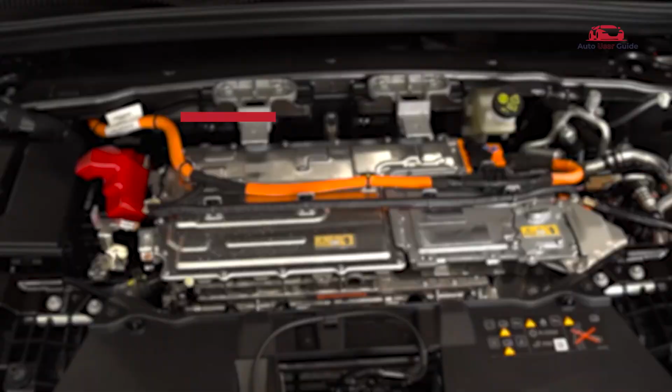Are you trying to locate the fuse box in your 2023 Renault Megane? Wondering where each fuse is placed or how to read the fuse box diagram correctly? In this guide, we'll walk you through the exact location of the fuse box and provide an easy-to-understand diagram to help you identify the fuses for various systems.

Engine compartment fuse box. The engine compartment fuse box protects and distributes electrical power to critical systems such as the engine, transmission, cooling fan, fuel system, headlights, and ABS, ensuring safe and reliable operation.

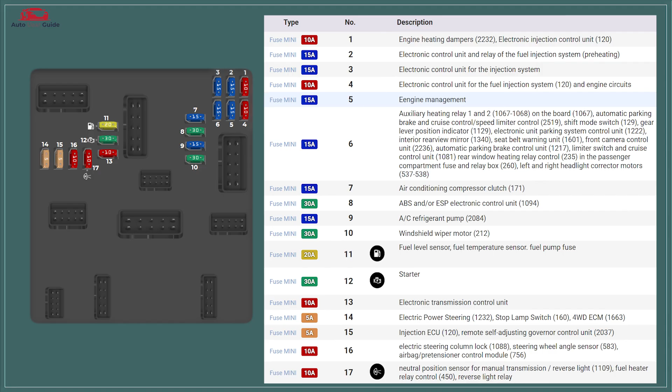Engine compartment fuse box. The function of the bottom section of the engine compartment fuse box is to protect and distribute power to high-load systems like the engine control unit, ABS, cooling fan, and starter motor, preventing damage from electrical faults.

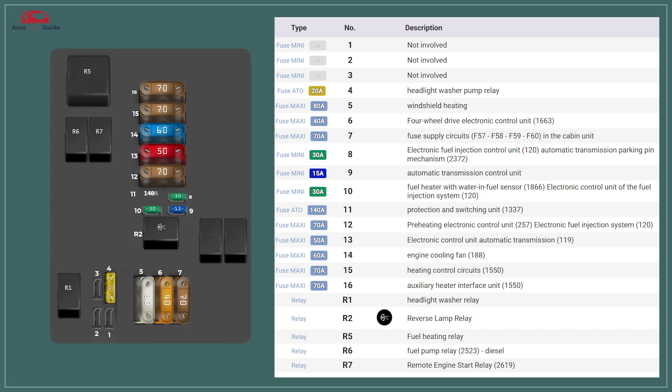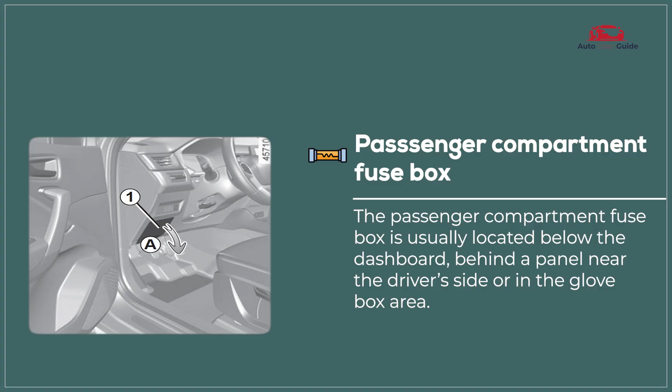Passenger compartment fuse box. The passenger compartment fuse box protects and controls electrical circuits for interior systems such as cabin lights, power windows, infotainment, climate control, and dashboard electronics, ensuring safe and reliable function.

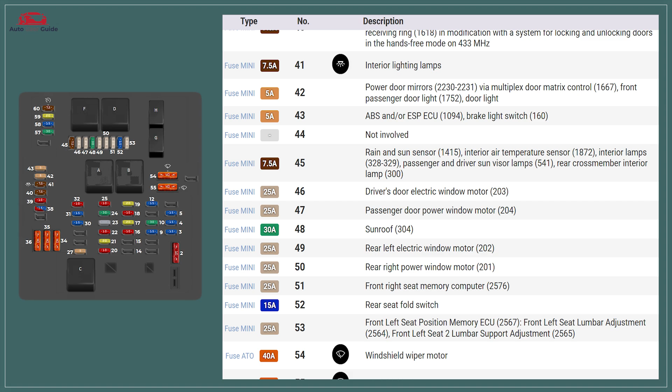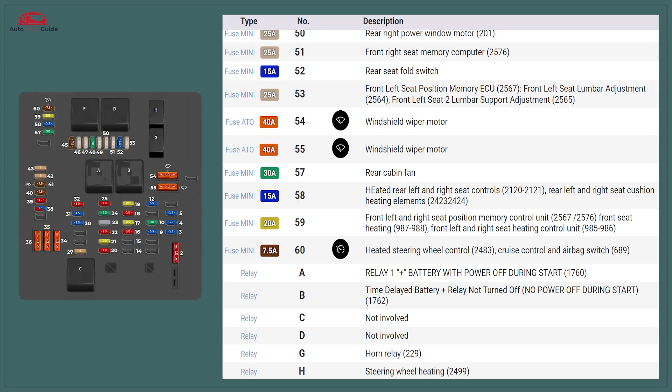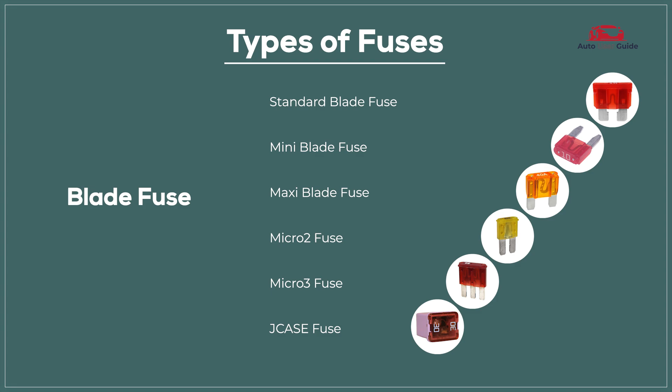Glass tube fuse, AGC fuse, SFE fuse.

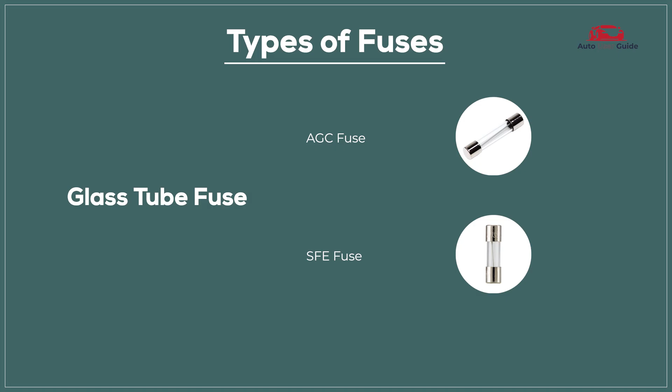Ceramic fuse, Bosch fuse, DIN fuse.

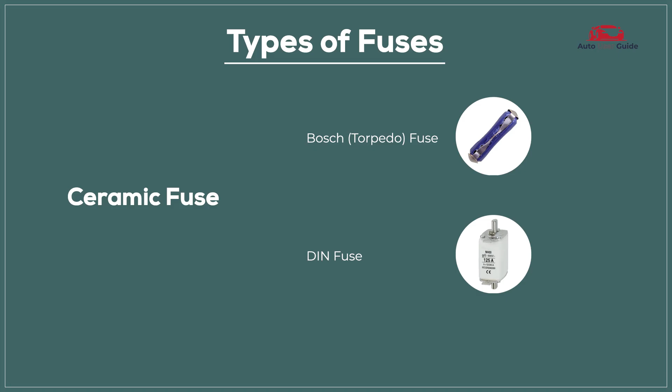PAL fuse, low profile fuse, standard PAL fuse.

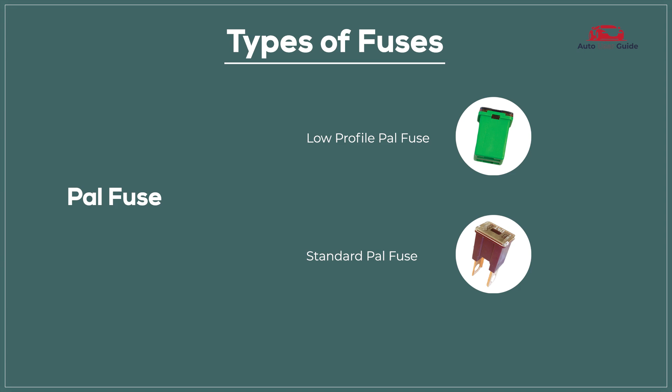Link fuse, mega fuse, high amperage link fuse.

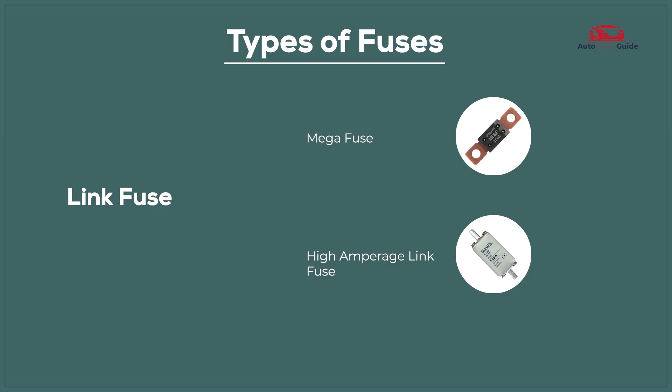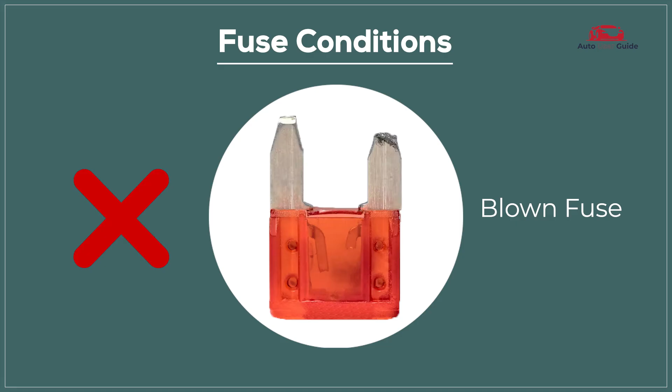Fuse conditions: blown fuse. A blown fuse means it's no longer functioning and needs replacement, while a perfect fuse is in good working condition and performing as expected.

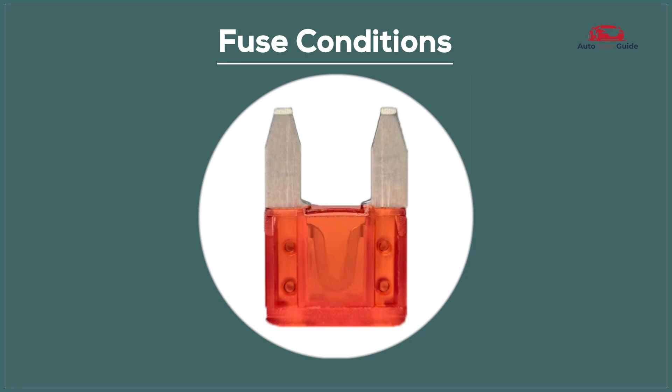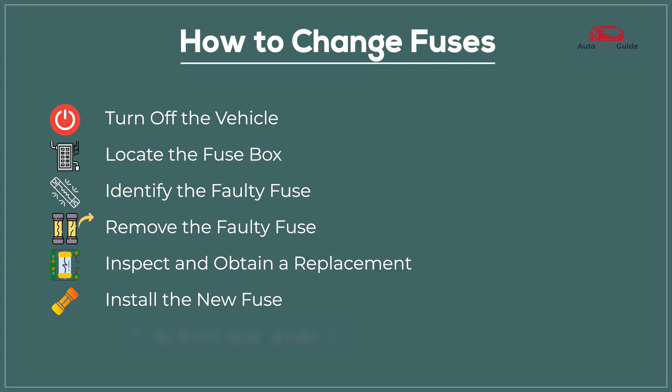How to change fuses: turn off the vehicle, locate the fuse box, identify the faulty fuse, remove the faulty fuse, inspect and obtain a replacement, install the new fuse, test the replacement.